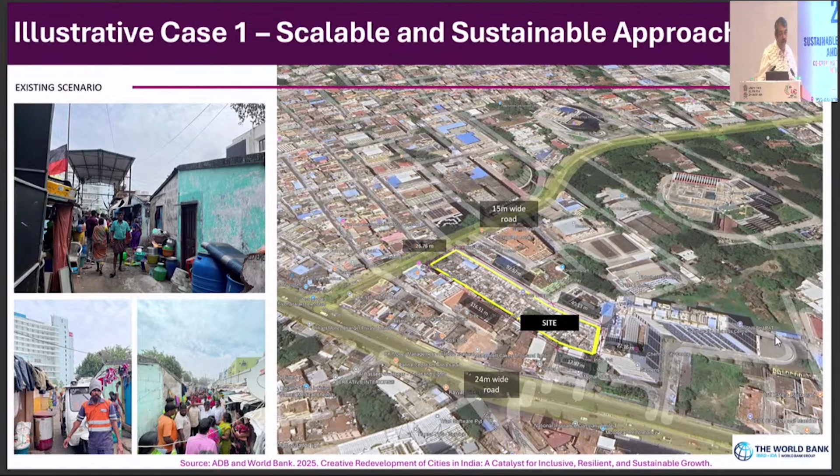So the first, in terms of redevelopment, we are looking at an area-based redevelopment, which is mostly slum housing, where we are ensuring that the existing residents and encroachers of that plot are provided a housing solution within the same plot, using whatever additional space is available to accommodate additional households. This is a very old model which has been used in PMAY in the past.

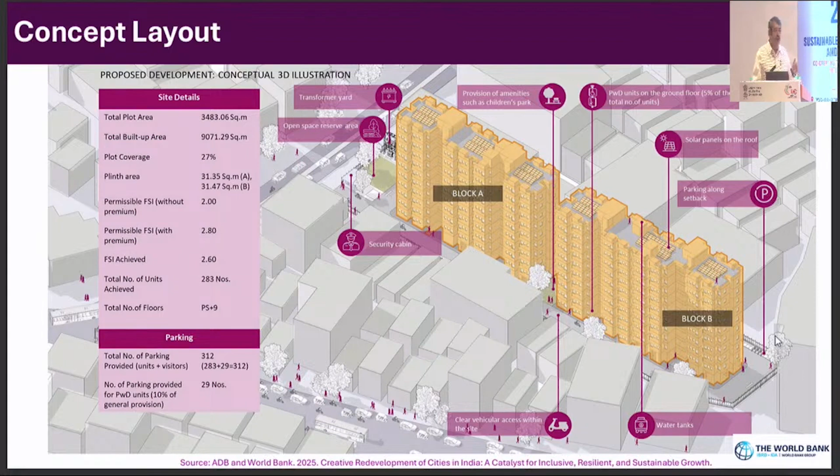I think what we are trying to do here is explore how to reduce the burden on the state exchequer while designing such a project. Many of you would have done similar projects in your cities. The whole question is how to reduce the subsidy element, something that Dr. Narayan was also highlighting. We need to see how to do this.

Within the same plot, after taking into account those who are already residing there, how best to use the DCR flexibilities to provide for additional middle income housing, or it could even be some retail space on the ground floor and so on. So how do we make sure that the projects become more and more sustainable?

Now, as the Urban Challenge Fund is launched, hopefully very soon, these kinds of projects would become very attractive if we can achieve that 50% ratio of getting the private sector, or leveraging financing from the private sector. So as you can see, we have explored multiple options.

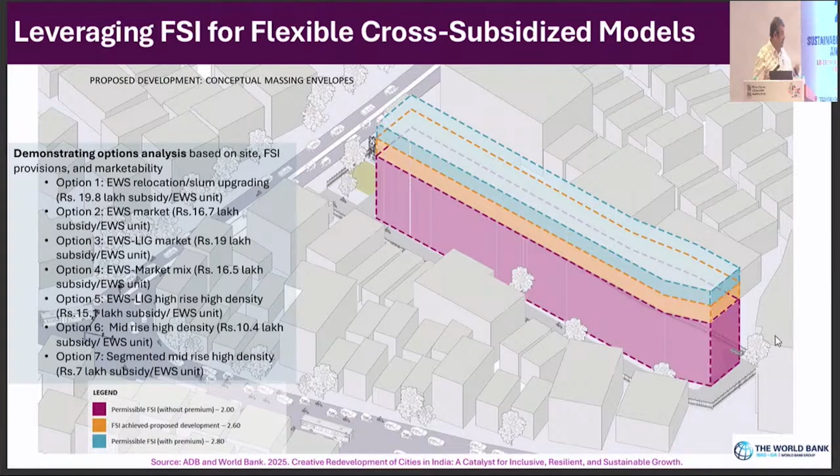I'm sure the presentations will be shared later, so you could go into details. But with each and every option, there are certain pros and cons. We are focused more on where the subsidy element goes down, and you can see there are various options that can be tried. TDR is also one of the tools that has been used, probably in Gujarat, to look at such options.

The second case study talks more about integrated planning, land use planning, transport and housing, that Dr. Narayan mentioned. We have a number of cities where metros are coming up, and for long all the cities have understood that the areas or zones along the metro line, especially in the station areas, can be used for land value capture through redevelopment.

So this is one such example where we are looking at the city of Mumbai, on one of the nodes.

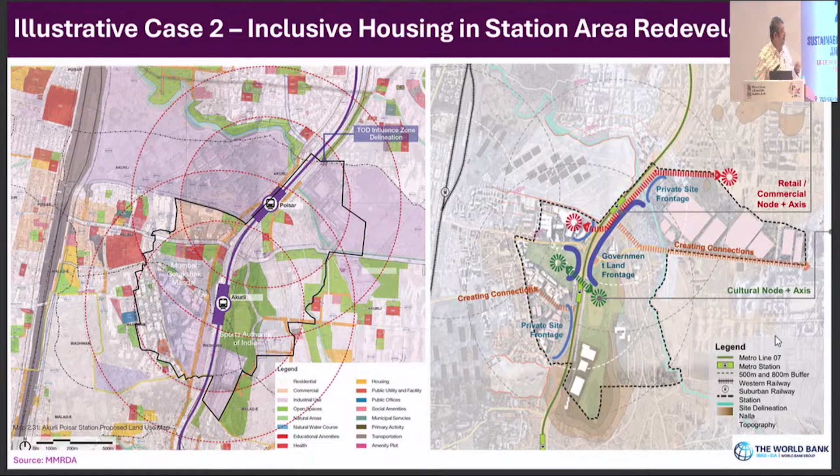I think the main purpose of this slide is to show that when we are looking at redevelopment, we need to look at both the public sector, what role it needs to play in terms of the implementation of the reconstruction and redevelopment that needs to happen, as well as that of the private sector. I think when the land value capture terminology is used, it is always thought that you can capture the value of land from day one.

That is not the case. If that were the case, the market would have already played out, right? So when we are looking at redevelopment and leveraging the potential of land, we have to be very sure on phasing our project.

Looking at where the housing needs to come, which are those phases the public sector has to come in and finance, and which are those phases where later, or maybe in parallel, the private sector can come in and finance.

The most important thing while designing such a project is that the affordable housing areas need to be located within a reasonable walking distance, so 1 kilometer, let's say, of the mass transit station.

One way Gujarat has done this, one way to incentivize this, is to actually earmark a proportion of area for affordable housing or public housing near the transit stations.

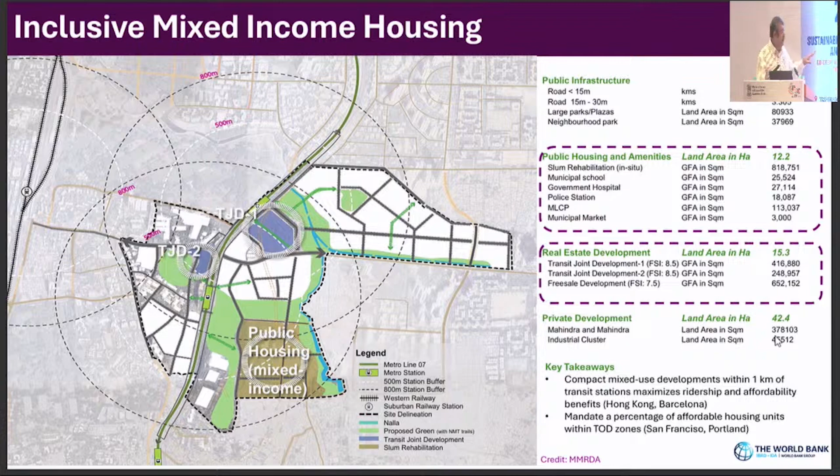So this is the same example. Here you can see we've done a market study and understanding, and based on that, based on the demand which was identified, a proper demand study was undertaken. Segmented solutions were identified.

So even within the private sector or within the public sector, there were certain segmentations undertaken to make sure that we are not delivering a one-fit-for-all solution, because those solutions usually don't end up working very well in the long run.

You would also see the way the phasing has been done, focuses on the affordable housing through the public sector first, and it also focuses on certain higher income and luxury housing near the transit stations from the private sector, which brings in the revenues to finance the rest of the housing projects.

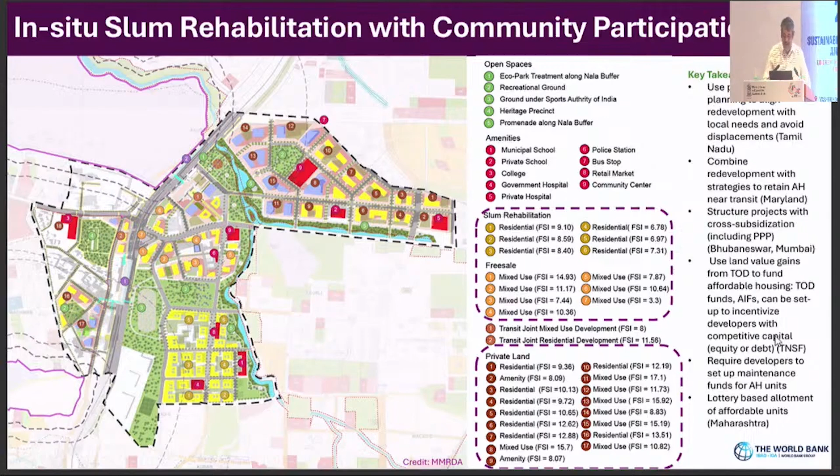In some cases, you will hear about the Tamil Nadu Shelter Fund, which Krishna will talk about. Such funding mechanisms can also help in taking ahead redevelopment projects.

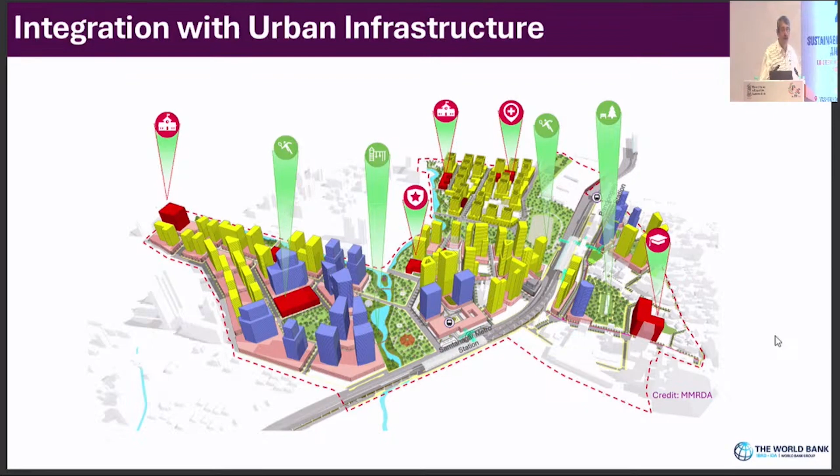I don't need to go much into this, I think all of us know that it's important to integrate infrastructure. Whenever we are doing an area-based redevelopment, social and physical infrastructure provision is important to create land value. Most DCRs will have some provisions for physical infrastructure. It's the social infrastructure that, based on my experience working with different cities and states, is where there's a bit of a lag, and people struggle to understand what to put where. So maybe this is where the central ministry can also look at guidelines like UDPFI, to see how they can be updated if we really want to push the redevelopment agenda forward.

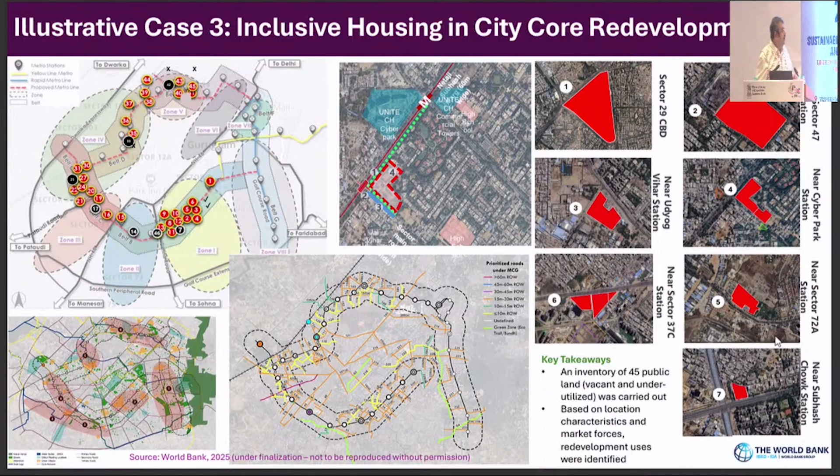Within the land plot identified that we are prioritizing, you can see that we are looking at a mix of residential, so mixed use. The previous example's focus was more on mixed income. In this, the focus is more on mixed use. So mixed income, mixed use as a concept within redevelopment in high density areas, TOD zones, etc., is very important.

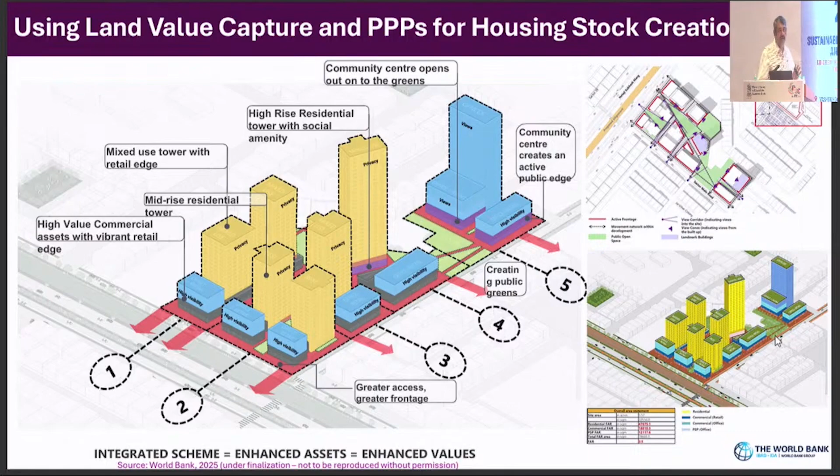The creative redevelopment framework also talks about a number of levers and enablers which are required. I will not run through all of them, but I'll focus on two of these. The first enabler I'd like to focus on is institutional.

One of the major problems when doing redevelopment projects is that land ownership within different state and central government departments can be very fragmented. In one of the cases we were working on, we had 23 land owning agencies from the public sector as part of a project. It becomes extremely difficult to structure a project around that. We're presenting an example of Maharashtra, which has provision for special planning authorities, allowing designation of one agency to plan and execute a project on behalf of the entire state government. So irrespective of who owns the land, there is one institution which plans and executes it in consultation with all the land-owning departments. Such innovative structures need to be thought of, again, as part of redevelopment, especially when it comes to housing.

The second thing I would like to highlight is upzoning. Many of these redevelopment projects, like the example of TDR that Sejal presented, may not be present in that particular state's own DCRs or policies. So the redevelopment project becomes a platform through which some upzoning requests can be put through, meaning you are requesting the state government to allow additional considerations for that particular project. These could be faster approval processes, incentivizing TDRs, or higher heights depending on certain parameters. So these are the two enablers I'm focusing on.

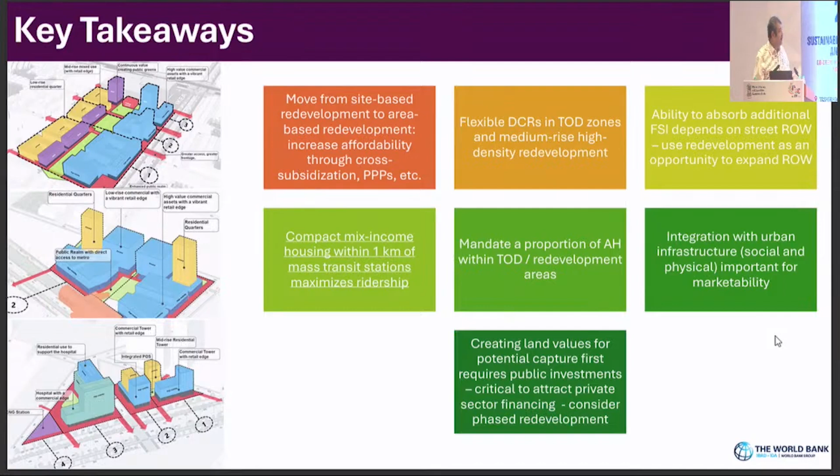So this kind of innovative thinking - Dr. Narayan did mention integrated planning, transport, and housing. Effectively, if you translate this into action, it means 3 different or sometimes 6 different departments and agencies need to work together at the city level. So these silos need to be broken. When we are doing these redevelopment projects, such vision would be good to have as part of the project. So that's all from my side. I'll be happy to take questions later. Thank you.